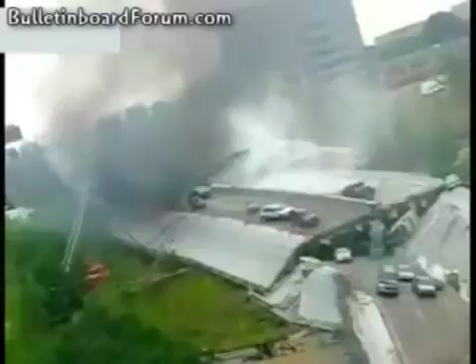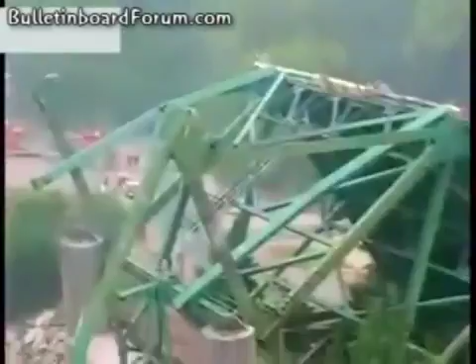In 2007, the I-35W bridge in Minneapolis collapsed in the height of rush hour. 13 people were killed and 145 were injured. In hindsight, there were signs of this impending doom, but there was no system in place to notify inspectors of the deficiency. We wish to introduce a widely implementable system to measure and/or monitor the health of a bridge in real time to prevent tragedies like the Minneapolis Bridge using state-of-the-art technologies available to analysts and engineers.

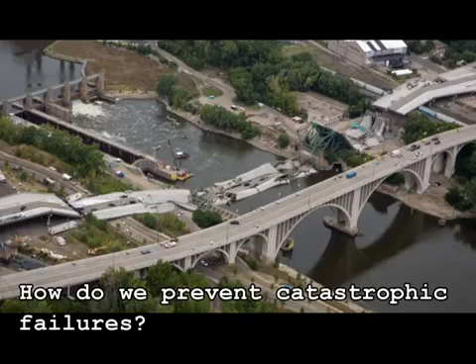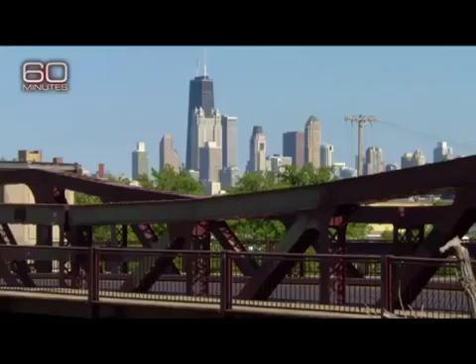Structural health monitoring is the task of assessing the structure's integrity in order to determine whether that structure is able to meet its operational requirement. Many infrastructure systems continue to be used despite aging and the associated potential for damage accumulation. The fact that nearly 70,000 bridges in America, 1 out of every 9, is now considered to be structurally deficient.

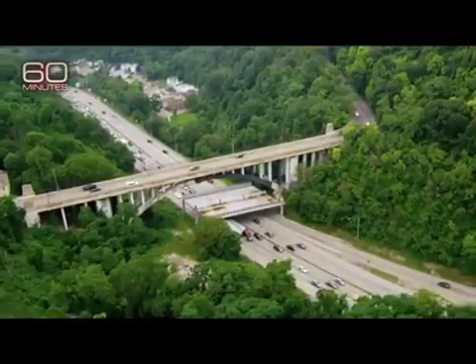These arch bridges actually have a structure built under them to catch falling deck. See that structure underneath it? They actually built that to catch any of the falling concrete so it wouldn't hit traffic underneath it. That's amazing. It all comes down to funding. Right now, they can't keep up with it. 300 bridges become structurally deficient each year in the state of Pennsylvania. That's 1% added to the already 23% they already have. They just can't fix them fast enough.

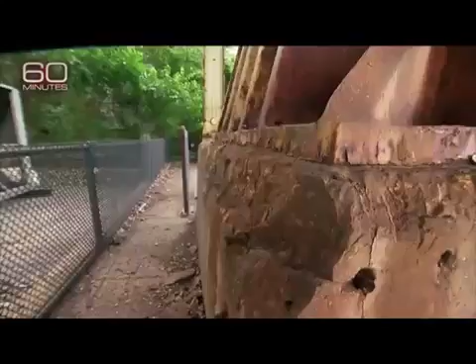With rising costs and shrinking budgets, the ability to monitor the structural health of these systems is becoming increasingly important from both economic and life safety points of view. For all these reasons, it is necessary to develop methods able to identify damage at its onset and to provide infrastructure's authorities with information on the structure's integrity. Such information is necessary to make educated decisions regarding the system's maintenance, repair, and retrofitting.

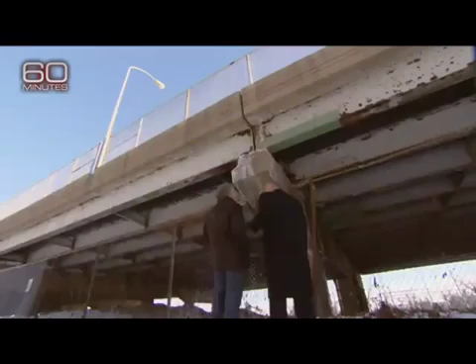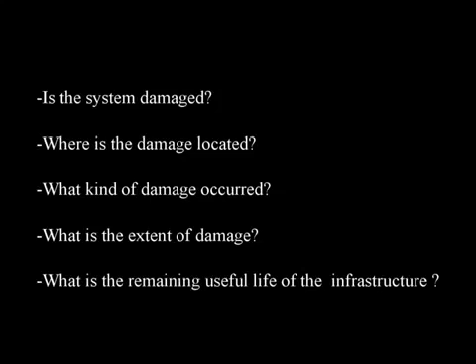The structural health monitoring techniques that we introduce try to answer the following questions. Is the system damaged? If so, where is the damage located? What kind of damage occurred? And what is the extent of the damage? Finally, what is the remaining useful life of the infrastructure given the identified damage conditions?

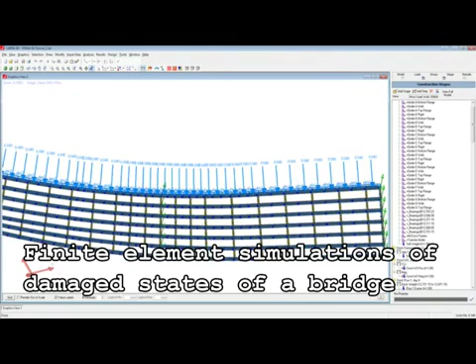In order to answer these questions, we use techniques that are used by civil engineers to design these bridges: finite element simulation software. Finite element simulation techniques provide an understanding of the response of a structure under loads when the geometric and material properties are known. In a regular design process, one finite element model is generally used to capture the response of the structure. In our approach, we create a database to capture the response of every state we can imagine, damaged or not.

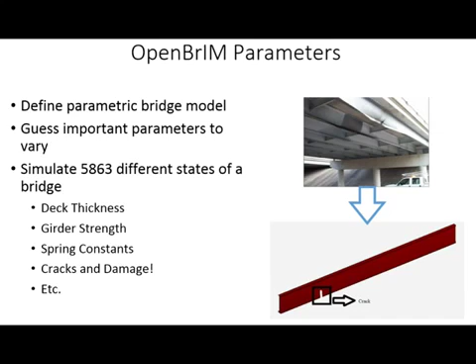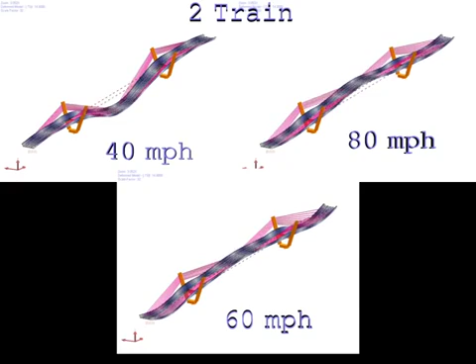For that reason, we use OpenBrIM to define our bridge parametrically. We then vary the parameters like crack width, crack location, deck thickness, and many others. This enables us to create a simulated response for every permutation of the defined parameters. The acceleration response of the structure under train loading is recorded for future analysis. By measuring the bridge response with sensors strategically placed on the structure and intelligently analyzing these measured responses, it is possible to identify damage occurrence.

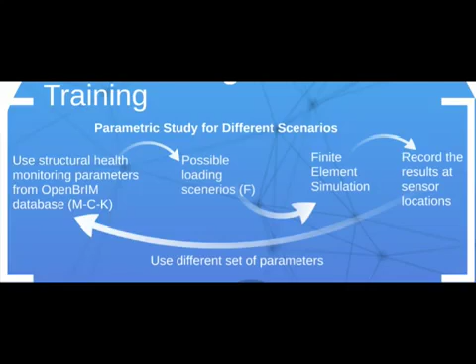OpenBrIM is used to parametrically model the bridge. The parameters are used to create mass, stiffness, and damping matrices. We apply loading scenarios like trains or an earthquake. Larsa 4D is used to run finite element simulations. Results are recorded at sensor locations, and the process is repeated for other parameters. The result of this process is a database that maps every parameter to a response.

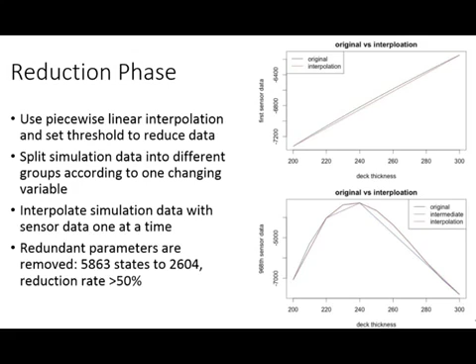In the data reduction phase, we first use piecewise linear interpolation to reduce the data. The simulation data is then grouped according to a single changing variable, or parameter. We interpolate the simulation data with the sensor data. Redundant parameters are then removed, thereby cutting the dataset in half. So what do we do with all this data? The end goal is to develop a method to relate real-world bridge data to our generated data.

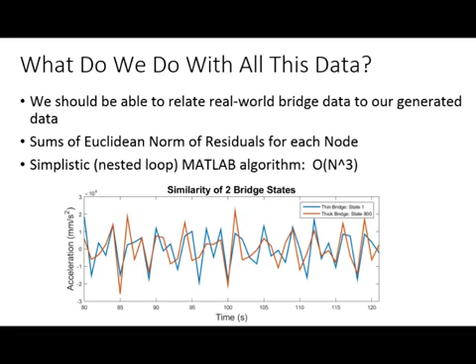Here you see graphs of two parametric states of a bridge. The plot in red represents a healthy bridge. The second plot, in blue, represents a bridge with a deteriorated or thinner deck. We measure the similarity of these two bridge states using the Euclidean norm of the residuals. Now we can do this for both the time domain as shown, or in the frequency domain.

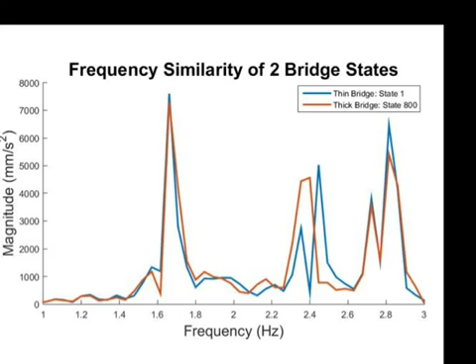Here we've taken the fast Fourier transform of the same data, again with the healthy state in red and the deteriorated state in blue. At about 2.4 Hz, the bridge response becomes bimodal from a single wide peak. The Euclidean norm will account for this variation. We can then perform our Euclidean norm calculation to compare every bridge state to every other bridge state.

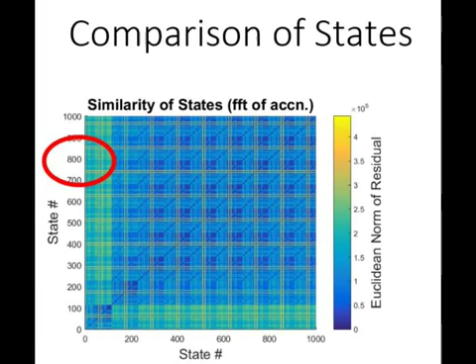The resulting map, shown on the left, illustrates a region around the two states of low similarity, shown by the yellow coloring. If we zoom into this map, we see some other interesting correlations. It appears that every 115 columns, there is some repetition in the figure while getting slightly darker. It turns out that every 115 rows, the deck material density parameter is changed.

Another significant feature we notice is the crisscrossing yellow lines throughout the figure. It turns out that one of these lines occurs when the modulus of elasticity of the main girders changes. The other line is when the bearing spring constant changes. The bearing spring is the main point of connection between the bridge columns and the deck itself. This makes sense since the main girders and bearings are such a critical aspect of the bridge structure.

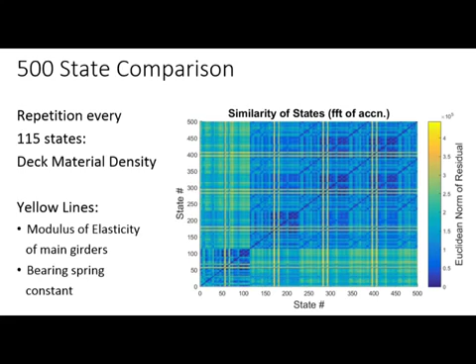There are many necessary improvements needed in order to improve the methods we developed in this project. These include alternative modeling methods for the bridge itself. We also need to validate whatever models we choose against real-world bridge data to determine their validity. In order to develop a machine learning aspect to this project, we need a more advanced distance function. Euclidean distance simply does not capture enough information for a machine learning algorithm to operate. Finally, we should develop a reversed recommender that takes as an input real-world bridge data and outputs the expected parameter set.